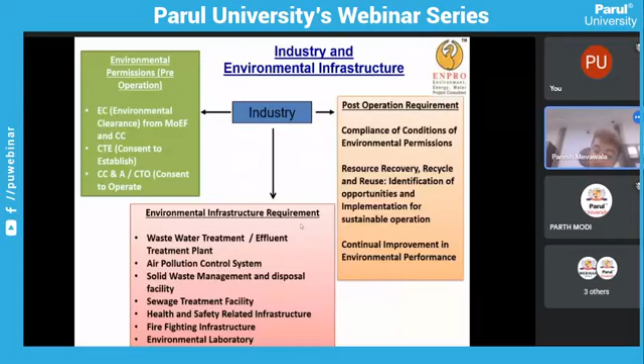So these are the general three phases for an industry, from the start of the industry to its operation phase. Now we will have a brief review on what are the legal requirements.

As far as environmental related permissions are concerned, the apex body is the Ministry of Environment and Forest, and Ministry of Environment, Forest and Climate Change, Government of India, at Delhi. The implementing agency sitting at Delhi is the Central Pollution Control Board, which has regional offices in various states. CPCB is basically an implementing and monitoring agency as per environmental laws and various notifications published by the Ministry of Environment and Forest.

At the same time, each state has their own forest and environment department at ministry level, and each state has their State Pollution Control Board, called SPCB. State-wise it is called GPCB for Gujarat Pollution Control Board, MPCB for Maharashtra Pollution Control Board, MPPCB for Madhya Pradesh Pollution Control Board, and so on. Each state has pollution control boards attached with their forest and environment department, and pollution control committees for union territories. These are the government bodies and authorities from where permissions are to be obtained.

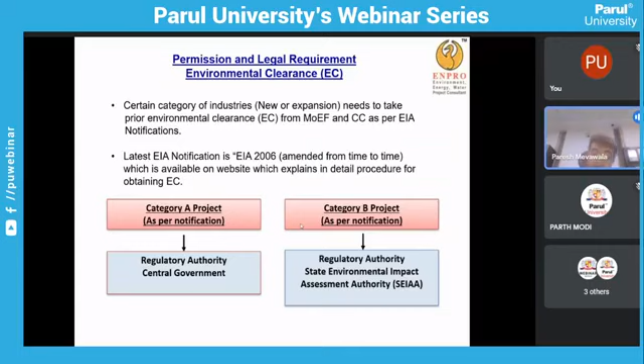And this entire environmental clearance procedure is an online procedure, the application, uploading of documents, everything is done online. So in brief, I will explain only in brief what are the stages of projects. Now, where is it applicable?

It is applicable for all new projects or existing projects who go for expansion or modernization, or they go for change in product mix, and falling under category A or B as per EIA, they need to take prior environmental clearance.

Now, what is prior environmental clearance? It is a clearance which you need to take before you start any new project construction phase or expansion phase. So you have to first take the permission and only then you can start the construction work. And the EC process, as per notification, you can go through that, and after that, they issue environmental clearance. So these are the stages.

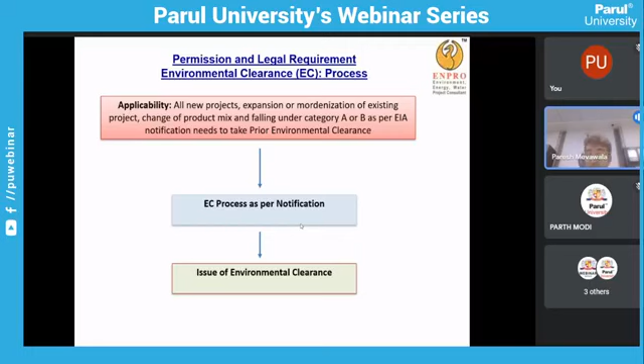All details are given in the notification, but these are the major stages which one should be aware of. For environmental clearance, you apply for terms of reference, which is online, and in which you have to give your project details, where it is located, what are the environmental features, what is likely to be the pollution load, what is the production capacity, what is going to be your effluent management system. It's a preliminary project detail with a project feasibility report, a small report you have to upload and apply for TOR.

Then on this application, either the committee, based on their scrutiny, grants terms of reference, standard terms of reference, or if they feel, they call for a presentation. If the project is very critical and it is not a conventional type of project, then they call for presentation for terms of reference. So one has to go for presentation to either Delhi at central level committee or at state level committee, depending on type of project.

Once TOR is issued by the committee, what does terms of reference specify? It specifies what you need to study in the EIA report. Everybody in environmental engineering field must be aware of what environmental impact assessment report is, so I'm not discussing what it consists of. But what I am discussing is that TOR consists of a number of points which need to be included in the EIA report, that is, the scope of the EIA report is finalized in terms of reference. So based on that TOR, the EIA study needs to be conducted.

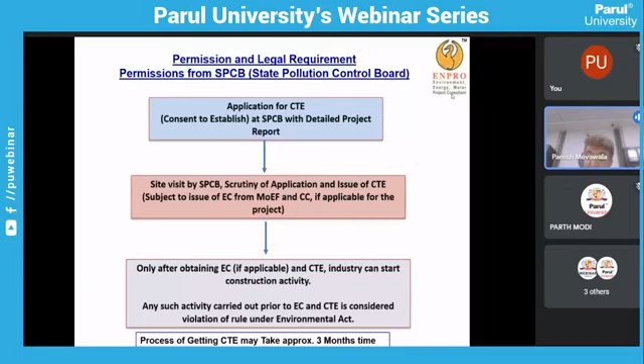Now, all polluting projects, whether they fall under EC requirement or not, have to get permission from the State Pollution Control Board. This is called a consent to establish application. So even if the project does not fall under EC requirement, they have to take consent to establish, which was earlier called NOC from the board. This is an online procedure, and one has to apply for CTE. Based on the site visit and scrutiny of the proposal, the State Pollution Control Board may grant consent to establish.

Once consent to establish is received, and environmental clearance is received, a project is considered cleared for starting construction activity. Then the phase of project execution comes, where industrial setup is done, pollution control systems are installed, and once the project is ready to start after execution...

industry has to apply for consent to operate. In that consent to operate, or CC&A, once industry applies, there is a visit of officers who check the compliance of industry according to the conditions laid down in environmental clearance and consent to establish. Once they confirm that industry has fulfilled the requirement as per application, they grant consent to operate to industries, and then industry will start operating the plant.

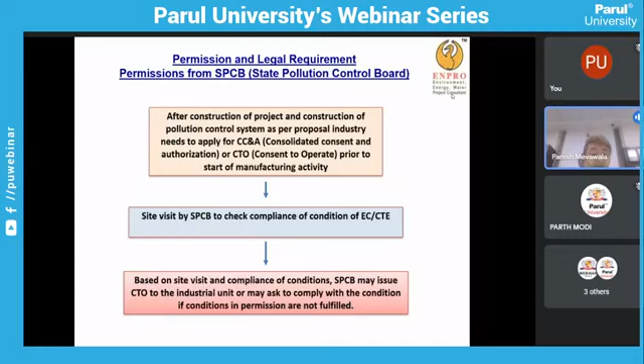Sometimes if they are not satisfied with the implementations, they may ask industry to complete the implementation. So these are the three basic permissions for establishing an industry to starting of industry, which are EC, CTE, and CTO.

In addition to that, industries are required to get approval of the layout map from local authority, permissions from factory inspector including fire NOC, on-site off-site emergency plan, risk assessment study, HAZOP study, etc. Those local level permissions are required, but are not part of environmental permissions, although they are supportive documents as necessary as environmental permission. So I think this is what I have covered about the various legal requirements from an environmental point of view to start an industry.

Now I will go to wastewater treatment plant. As we discussed, during your permission stage you have to give all details of what type of wastewater is going to come, and what type of effluent treatment plant you are going to propose. So the designing and planning of wastewater treatment facility comes right from the stage of application. For obtaining any permissions, design of an adequate, robust, and sustainable wastewater treatment scheme is very essential, which can address the requirement of disposal norms and mode of discharge for that specific site.

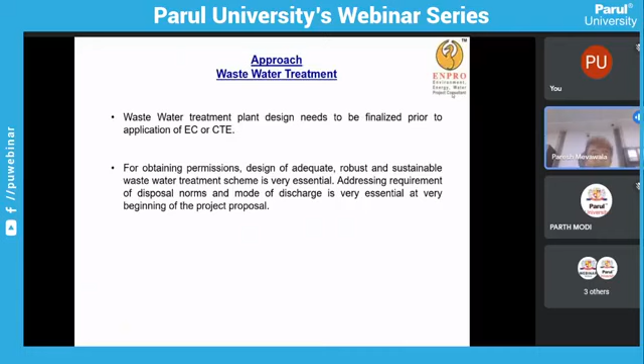So the question is how to arrive at a suitable wastewater treatment scheme for a new industry or an existing industry proposing expansion. It is very important for newcomers in this field to understand that any wastewater treatment plant design or implementation needs a thorough study of the wastewater being generated from the industry. It is very essential that adequate laboratory level knowledge is required by the environmental engineer. Maybe they are not involved in testing, or they may not do real analysis of the wastewater, which is generally done by environmental chemists.

But any environmental engineer has to understand the significance of various parameters in wastewater, and the significance of knowledge of laboratory level treatability study, based on our experience in these analyses. Generally, for them, this laboratory level knowledge is not a priority in their knowledge, but it is very important to have that laboratory level knowledge also.

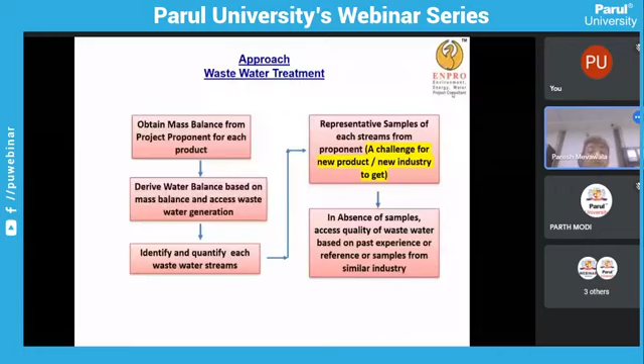And in the absence of samples, assess the quality of wastewater based on past experience, references, or samples from similar industries. Okay. That is why I told you in the earlier slide to segregate all streams generated from a single plant. Then divide the streams into 4 major categories like high TDS high COD, high TDS low COD, low TDS low COD, and low TDS high COD. And then based on higher concentrations of compounds such as heavy metals, phenolic compounds, ammonical nitrogen, hexavalent chromium, or any such parameters which need separate pre-treatment prior to common treatment.

It is essential, because if you club all streams together, the treatment will become very difficult, since some effluents are low in concentration and their treatment is relatively simpler than effluents having higher concentration. So if you mix all effluents together, your overall treatment becomes very difficult, sometimes infeasible and very costly to operate. So it is important that all streams be segregated at source, analyzed separately, segregated into different categories, and then work out a treatment scheme which becomes the most optimum treatment scheme.

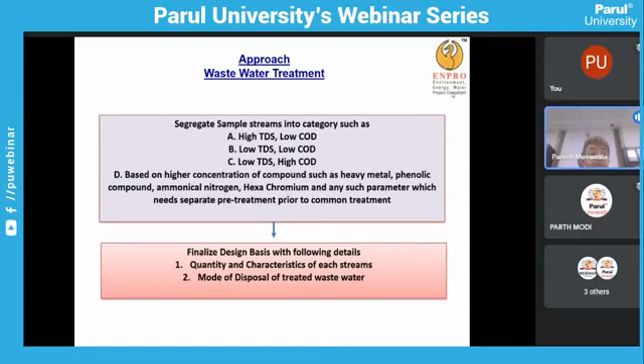Now, based on this segregation, one has to finalize the design basis for the wastewater treatment plant, which consists of the quantity and characteristics of each stream, and of course the mode of disposal of treated wastewater. Now, the modes of disposal can be disposal on surface water flowing to the sea, like a khadi, and norms of disposal on surface water are given by the State Pollution Control Board. But nowadays no such permission is being issued to dispose wastewater on surface water. Earlier this was being granted, but recently no such permissions are granted.

Then disposal to CETPs. CETPs are common effluent treatment plants. A CETP is a facility where the industry has to bring down its pollutant level up to the CETP inlet norms and then supply the effluent to the CETP. And the CETP will treat and then dispose it further. Then disposal to deep sea is another alternative. But for a single industry, this may not be possible. Disposal to deep sea can be done by a CETP or by a very large industry.

Then zero liquid discharge. What is zero liquid discharge? There is no disposal from the industry. The entire wastewater is treated to the level that the recovered water produced can be recycled back to the industrial unit. So it is called a ZLD unit, used in landlocked states. In Gujarat we have the sea and a disposal facility, but states like Madhya Pradesh, these North Indian states, or Rajasthan don't have any disposal point.

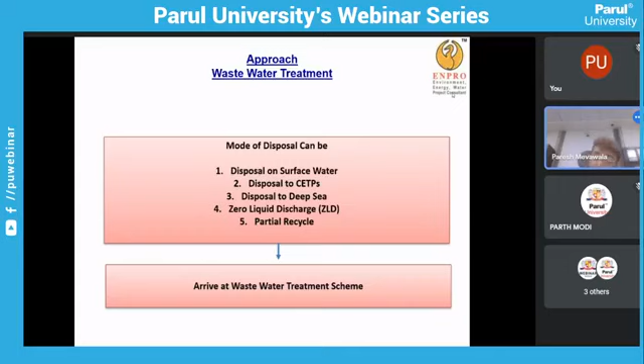So I have prepared a slide to show some typical treatment schemes for different types of wastewater. For example, this is for a low COD, biodegradable wastewater with TDS also on the lower side. These may be from textile or paper industries, industries generating a high volume of wastewater. They generally have this type of effluent characteristic, where the primary treatment does physico-chemical treatment and chemical dosing and removes suspended solids in clarifiers, and after that soluble COD and BOD are reduced in biological treatment, which can be aerobic or a combination of anaerobic and aerobic treatment.

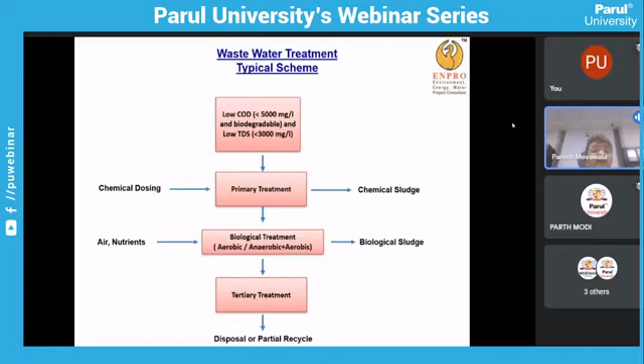I'm not going into those details because you have studied those things. I am focusing on how to arrive at the treatment scheme. Then one has tertiary treatment, and after tertiary treatment the effluent can go for disposal or partial recycle. So this is a typical conventional effluent treatment scheme. Probably you have studied it in your courses.

Then this is the wastewater treatment. Another type of scheme is when you have effluent of high TDS level, more than 15,000 milligram per liter, and low, medium, or high COD. Generally, when the TDS level goes above 15,000 or near to 20,000, biological treatment becomes non-feasible. It doesn't work. That is our experience.

And you will find a number of chemical industries, pharmaceutical industries, pesticide industries who generate this type of effluent, and a conventional effluent treatment plant doesn't work there. So one has to go with another type of wastewater treatment scheme where, after a primary treatment, of course, you have to remove suspended solids and sludges prior to the treatment, and then you have a membrane-based treatment where one uses ultrafiltration membranes, nanofiltration membranes, and RO membranes to separate TDS and COD from the wastewater.

And the permeate, that is good quality water from the membrane separation, is sent for recycling, and the reject, that's a concentrated stream from the membrane system much higher in concentration of TDS and COD, is subjected to evaporation in multiple effect evaporators or mechanical vapor recompressors with dryers. Here, energy like steam is used for evaporation, where from the concentrated stream water is recovered in condensate form, which is subjected to recycling.

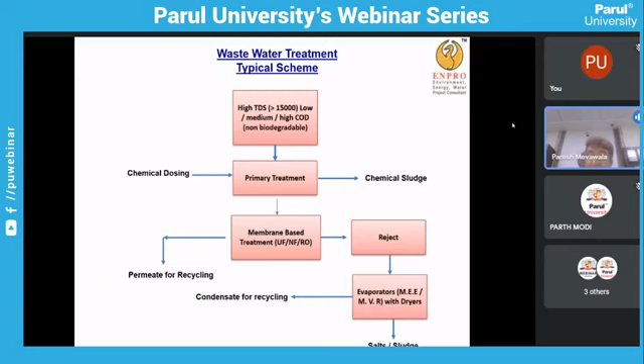And sometimes when such low volatiles, solvents like methanol, acetone, are present in the wastewater, the membrane system up front doesn't work, because the membrane system gets damaged in the presence of solvent. So in that case, one has to directly go to evaporators, that is steam-operated equipment, and recover the condensate, which will be contaminated with low volatiles and COD. That needs to be given a biological treatment followed by a membrane treatment. After membrane treatment, the good water will be recycled, and the reject from the membrane treatment will be fed back to the evaporator. So this is also a sort of ZLD scheme.

Second ZLD scheme, you have an evaporator followed by membranes. Evaporator followed by biological treatment followed by membranes. So these are the typical ZLD schemes used for pharmaceutical industries, chemical industries, pesticide industries, where effluents are very high in concentration. Here, conventional biological treatment does not work.

Now we come to another type of industrial effluent, which consists of inorganic pollutants like heavy metals, chrome, etc. Those are very toxic, and it does not consist of organic pollutants in large quantity. Generally, this type of effluent gets generated from engineering industry, coating industry, and electroplating industries. So here, many heavy metals may be present. If, let's say, chromium is present, for each type of metal there is a different set of treatments generally, which needs to be finalized at laboratory level and based on experience from past effluent treatment plants.

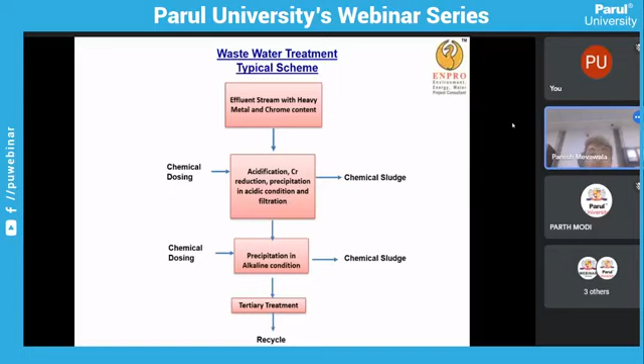Similarly, one example is about phenolic compound treatment. Phenol is very toxic for biological treatment. So before biological treatment, if the effluent consists of a lot of phenols or phenolic compounds, they need to be removed or knocked off prior to biological treatment. This can be achieved by using a phenol recovery unit, phenol distillation unit, recovery by ion exchange method, or phenol oxidation using Fenton treatment or ozonation treatment.

So you have to bring down the phenol level to at least less than 5 milligram per liter before the biological treatment. Sometimes in some effluents, phenol can be as high as 100 milligram per liter or more, so such effluent needs this type of pre-treatment. Many specific effluents will need a pre-treatment prior to taking that effluent to conventional effluent treatment.

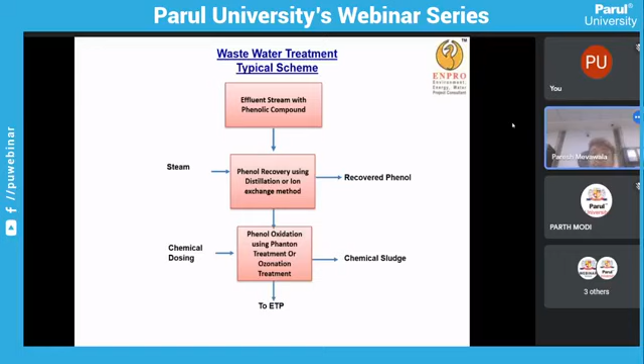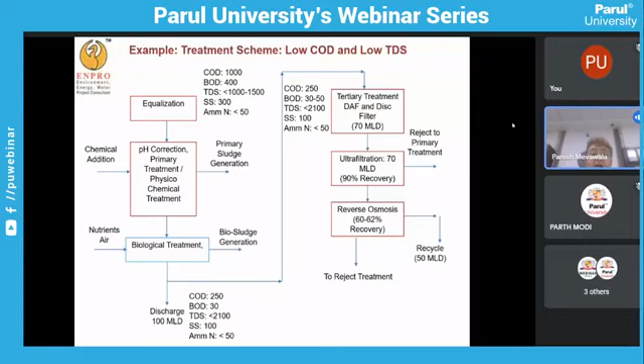So these are some real life examples of typical treatment schemes, like low COD, low TDS. As I told earlier, equalization, then primary treatment, biological treatment, then tertiary treatment, and a partial recovery of wastewater. This is for one of the CETPs which we have done.

This is another example of a CETP where you have multiple industries from the chemical sector and multiple types of effluent. Effluent is transported to the CETP through designated tankers. Tankers are analyzed, and based on the analysis, they are stored in different storage tanks, and from those storage tanks, for specific treatment, effluent is transferred to different sections of the wastewater treatment line, like C1, C2, C3.

So this is a very good example where you have to collect the wastewater in segregated form, store it in segregated form, and treat it as per the requirement in various sections of the CETP. This is one CETP which is under operation.

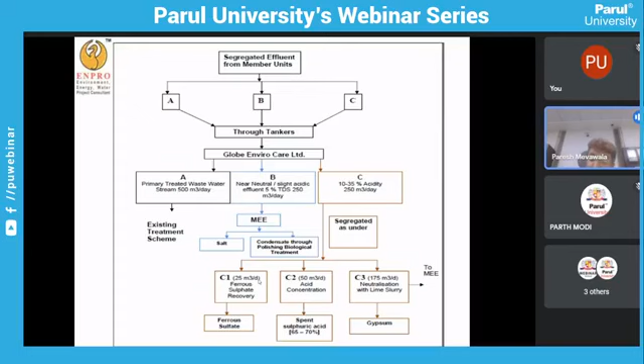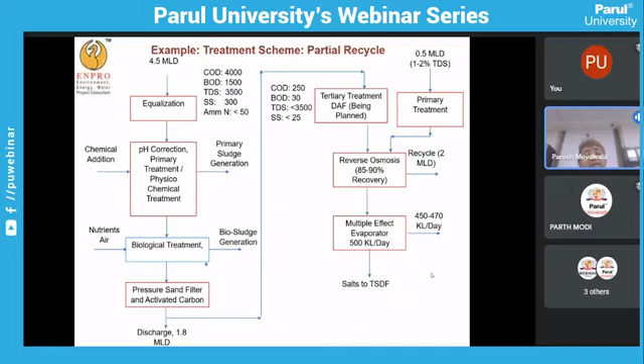Similarly, this is another CETP of about 5 MLD, where 50% of the effluent is subjected to zero liquid discharge and sent back to member unit industries, and the balance effluent is discharged. This also consists of primary treatment, that is chemical addition, then biological treatment, then tertiary, and then discharge. Part of this stream goes to a tertiary treatment plant consisting of DAF, RO plant, multiple effect evaporator, and here effluent is recycled back. We discussed all those examples and typical schemes in earlier slides.

Now this is the typical plant for one of the API units, where, as I told, the entire effluent is subjected to evaporators first, and then to ozonation, biological treatment, and RO plant. So this is another set.

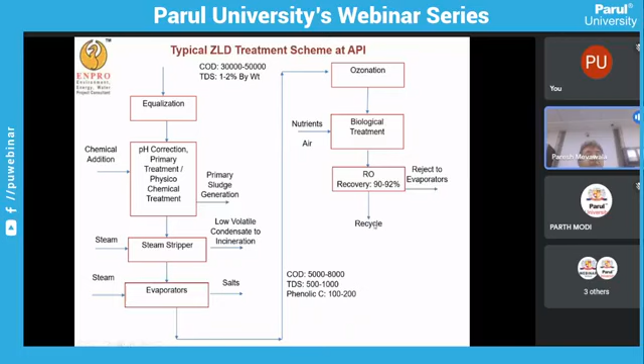So regarding wastewater treatment, the presentation ends here. What I mean to say is that a treatment scheme is not universal. It's not common for all types of effluents. One has to select a treatment scheme based on the quality of the effluent, based on the segregated stream analysis of the effluent generated from specific industries. So one has to design a treatment scheme which is robust and sustainable.

Robust means it should withstand the requirement without any hiccup in the operations. And sustainable means it must be operated at an optimum cost level, so it is sustainable for industries also, and suitable for the available mode of disposal at the location of the industry.

A chemical engineer or environmental engineer who works on this, because this work up to this point is process work, should be able to do basic sizing of the major components of the effluent treatment unit once the treatment scheme is done. This comes under your core study, which you have to study in future, and you have to learn how to size the equipment. Then you should be able to work out the consumption of chemicals and power, to work out the operating cost.

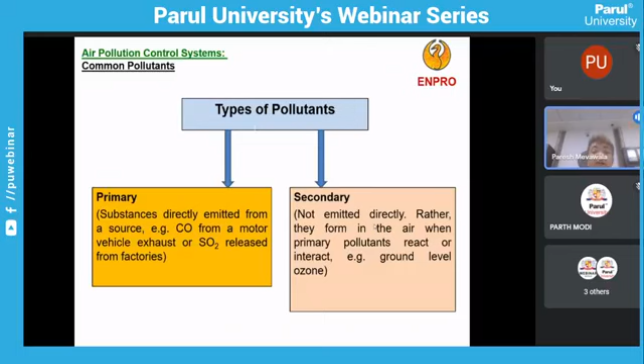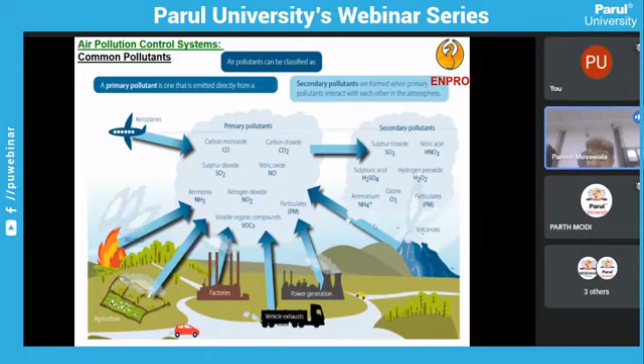So this I'll go very fast. Like, what are the types of pollutants? One has primary pollutants, such as carbon monoxide from motor exhaust and SO2, and secondary pollutants, which form in the air when primary pollutants react or interact, that is ground level ozone. So these are the various air pollutants, segregated as primary pollutants and secondary pollutants. I think you all know all these theoretical details, so I will skip this.

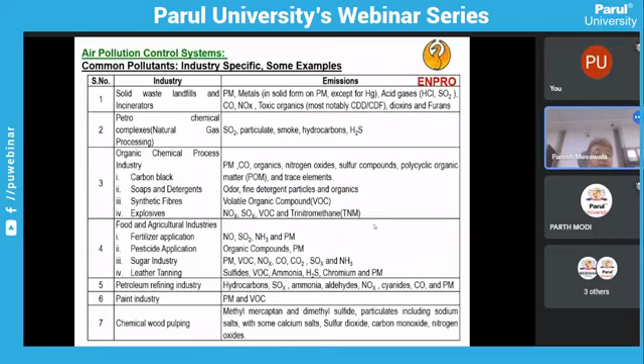Like the food and agriculture industry: fertilizer will have NO, SO2, ammonia, particulate matter. Pesticide will have organic compounds and PM. The sugar industry has PM, NOx, CO, CO2, SOx, ammonia. The leather industry has sulfide, VOC, ammonia, H2S, chromium, PM. So one has to keep this at the back of their mind.

Now, what are the different technological alternatives for air pollution control? The air pollution problem has three options for control. One is improve dispersion. Second is reduce emission by process change or pollution prevention, and third is use a downstream pollution control device. The first two options we will not discuss much. We will discuss the third option only, that's a downstream pollution control device.

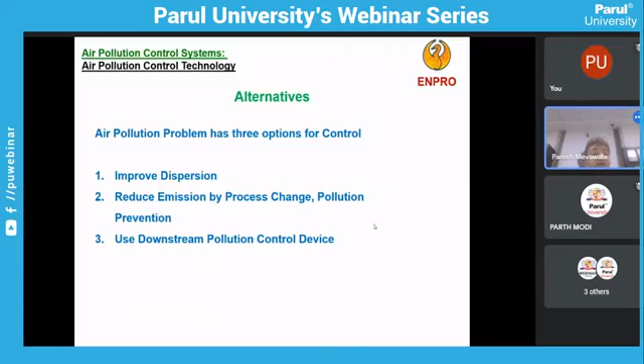Now the first alternative, improve dispersion. If you have studied dispersion analysis, how the flue gas from the stack goes to atmosphere, how the dispersion takes place, and what is going to be the GLC, ground level concentration. So if you increase the stack height, you increase the dispersion, and your GLC will come down. This is just a sort of dilution of flue gas into more volume of ambient air.

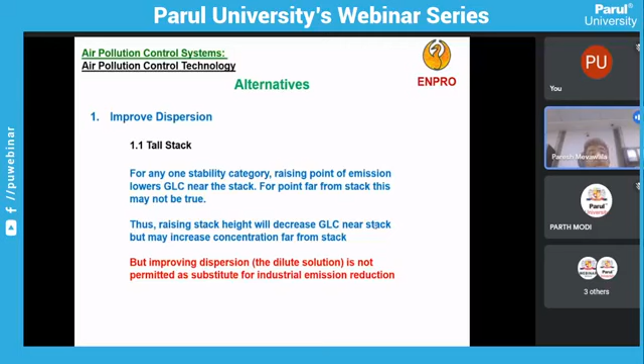But improving dispersion is not permitted as a substitute for industrial emission reduction. One has to keep in mind that dilution is not the solution. One has to treat either wastewater or air pollutants before they are discharged to the environment. Then another option is an intermittent control scheme, like you must have read in the newspaper, staggered vehicle traffic in Delhi to improve the ambient air quality, and sometimes not allowing operation of incinerators at night time in certain industrial estates near residential areas.

Then this is also very important, process change and pollution prevention. Sometimes you control the pollutant at source, you change the raw material so that your emission level goes down. For example, an oxygen based smelting process instead of an air based smelting process results in a high concentration of SO2, leading to feasibility of sulfuric acid production. Sulfur dioxide was earlier emitted in small concentration when air was used, so you had to put pollution control equipment. Now, when you use oxygen, you generate SO2 at higher concentration, so you can install a sulfuric acid plant to convert SO2 to sulfuric acid. So this is an example of a process change.

Similarly, switching to cleaner fuels. Similarly, carpool, mass rapid transportation systems, work from home. Maybe that is a compulsion, but these are the various alternatives for process change and pollution prevention.

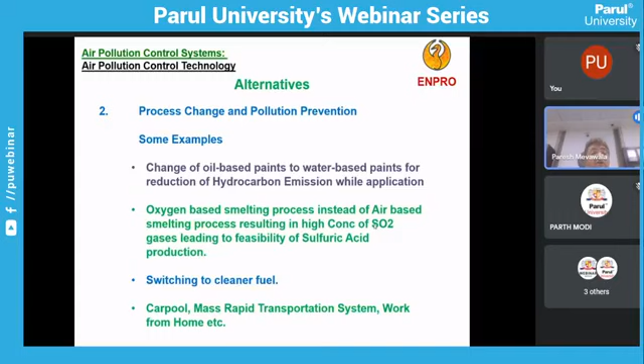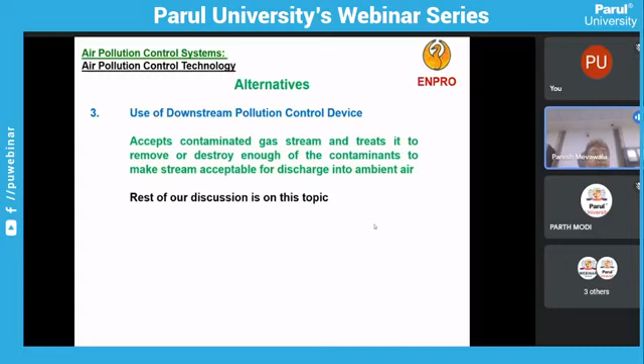Now, use of downstream pollution control devices. The rest of our discussion will be on this topic only. As we discussed for the wastewater treatment plant, the methodology for selection of an air pollution control system is again the same. You have to get input from the industry for a new system, survey, measurement and data collection at site for an existing system, and one must be aware of the statutory emission limits permitted to the industry.

How to survey, measure and collect data at site for an existing system? That brings into the picture stack monitoring, the skill of stack monitoring, study and testing of process emissions, testing of flue gas emissions at the laboratory after sampling. So again, engineers and chemists, even if they are not in this field or will not do environmental monitoring themselves in future, must be aware of what the measurement is, how data is collected, and the significance of the various parameters.

Then one has to fix the design, like flow data, operating condition, pollutant concentration, inlet, what is going to be outlet, and verification of design basis for identical industry based on past experience and reliable references. This is also very important, because when you do the first time selection of equipment, you must verify from various data for this type of industry what type of pollution control systems have been installed, what were their problems, what were their past experiences, so that you can improve your selection.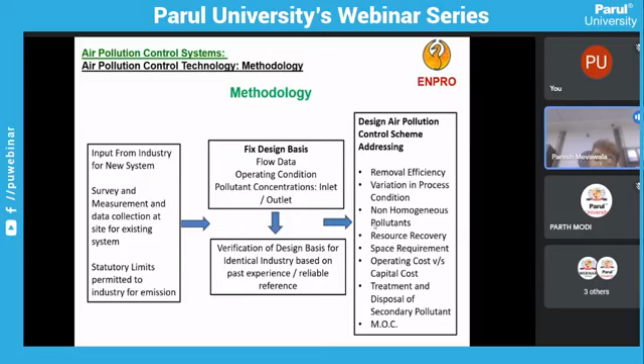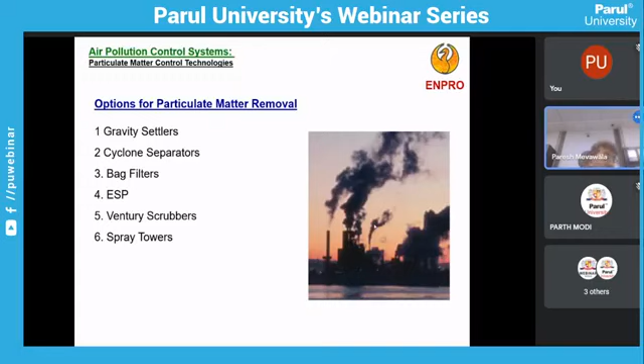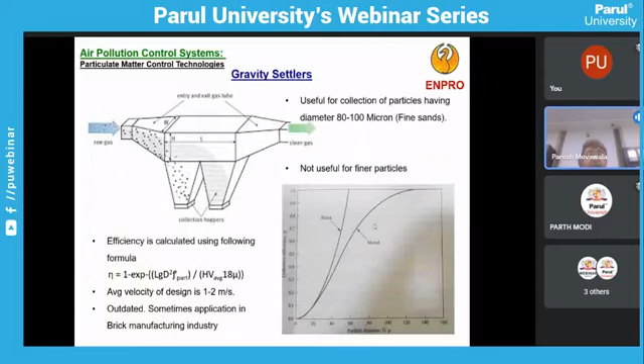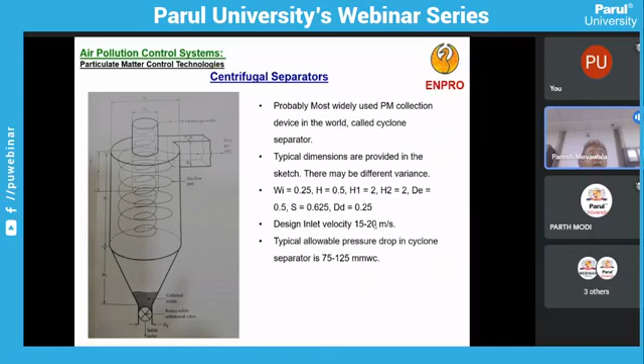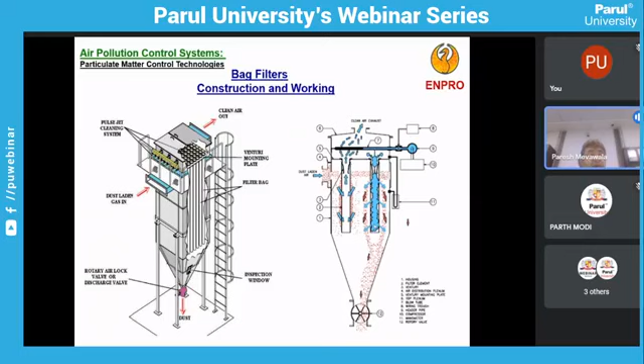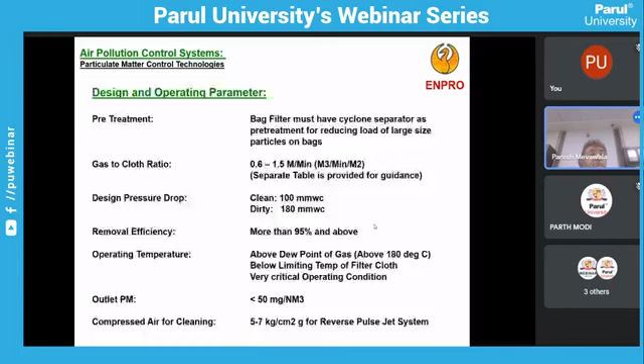These are different types of bag filters, reverse pulse system type, and there is a mechanical shaker type of bag filter where particulate matter is filtered on the bag surfaces and is recovered by reverse pulsing of air. So these are the bag filters for collection of finer particulate matter. These are various design criteria for the bag filters I have given. Most important is gas to cloth ratio, design pressure drop, and outlet particulate matter. These are the properties of various bags used for the bag filter, what temperature they can withstand, and based on the process condition, one has to select the bag.

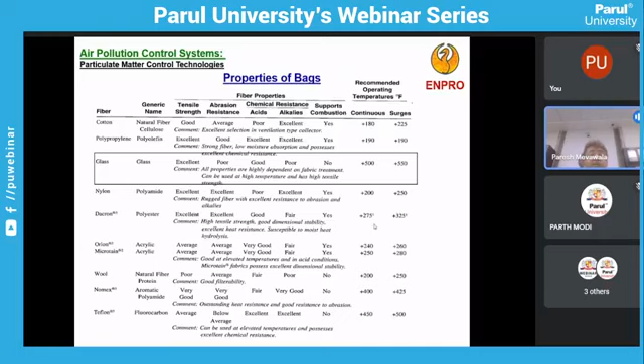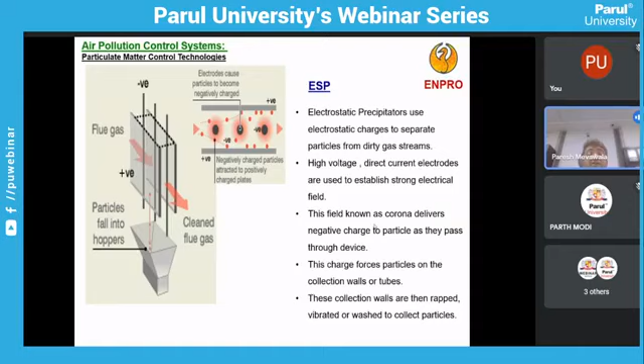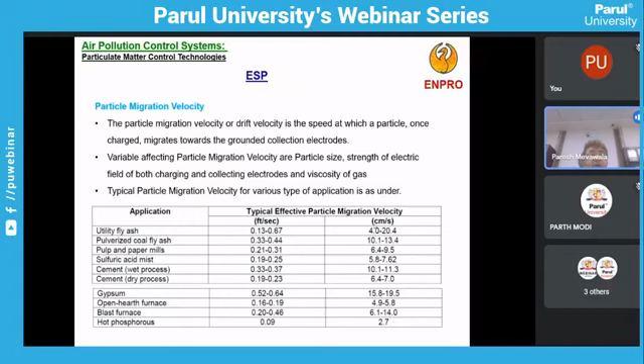Then there is an electrostatic precipitator. Electrostatic precipitator is highly efficient equipment for removal of particulate matter. Bag filter, electrostatic precipitator and cyclone separators are designed for removal of particulate matter. These are the various design criteria for electrostatic precipitator for different types of dust like utility fly ash, pulverized coal fly ash, sulfuric acid mist, gypsum, open hearth furnace. Dust which is very low in conductivity has lower removal efficiency. Dust which is high in conductivity has higher removal efficiency. So accordingly, ESP is sized.

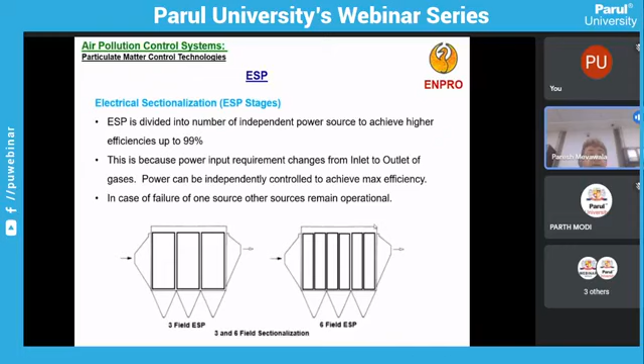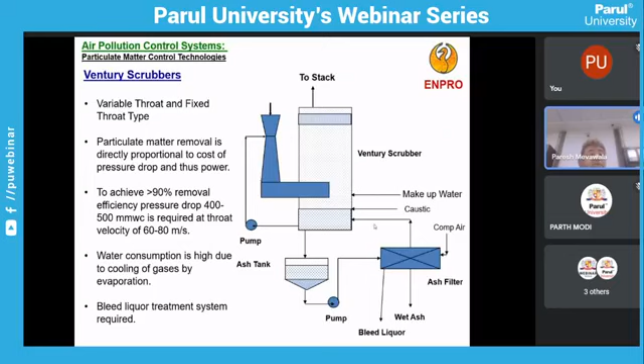Multiple stages of ESPs are generally installed, 3 stage or 5 stage or 7 stage, to achieve very high removal efficiency of 99%. Generally, power plants and large boilers have ESPs. Then one has a Venturi scrubber. What we discussed is dry removal. Now, this is wet removal. Venturi scrubbers are a wet scrubbing system used for simultaneous removal of particulate matter and gaseous pollutants. These can be fixed throat type and variable throat type Venturi scrubbers for removal of particulate matter and gases.

So advantages are it is smaller in size than bag filter and ESP. Simultaneous capturing of particulate matter and SO2, HCl can be handled in single equipment. It is robust equipment with less chances of failure. But what are the disadvantages? Operating cost is high. Then it generates a very large quantity of secondary pollutants, that is wastewater containing a lot of dust. So that needs another treatment plant to handle it. In dry scrubbing, you get dry dust at the bottom. Here, you get a liquid slurry at the bottom, which needs to be treated again.

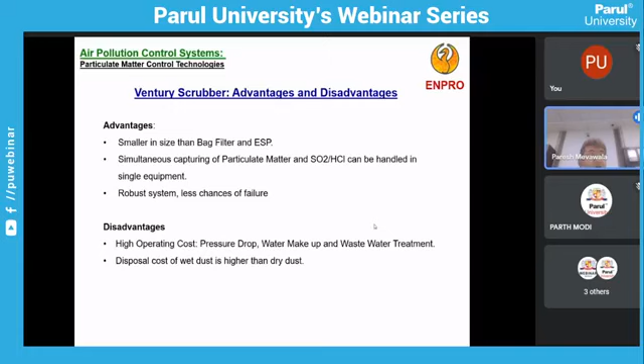So, one can follow this guideline for selection of technology. Cyclone separator can be used when particle size is 10 micron and above, and overall efficiency is 70 to 80%. Capex 1 is the lowest, and 5 is the highest. So capex and opex both are lowest. Multi-cyclone separator, you have 5 micron and above particle size, and 70 to 80% removal efficiency. Bag filter, when up to 1 micron particle size, you need a bag filter. Then ESP up to 2.5 micron, 99%, and pressure drop is very low. So it has the highest capex, but the opex is lowest.

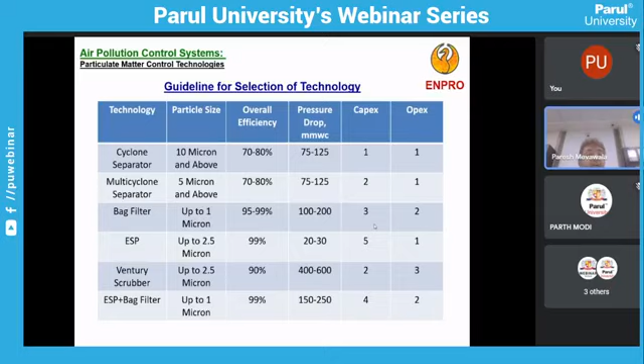ESP at that efficiency. If you see the bag filter, your capex is at number 3, but opex is also at number 2. Venturi scrubber, again capex is very low, but opex is very high. Sometimes you have to go with a combination of ESP plus bag filter, where your capex is at 4 and opex is at 2. So depending on the process condition, type of dust, and volume of process gas, equipment combinations are selected.

This is one example of how complicated an air pollution control system can be, for hazardous waste incinerators. Here you have major pollutants like particulate matter, SO2, HCl, NOx, heavy metals, vapor, VOCs. All these types of air pollutants are available in the gas incinerator, where you have multiple stages of air pollution control, like after combustion and waste heat recovery, you have a gas quencher.

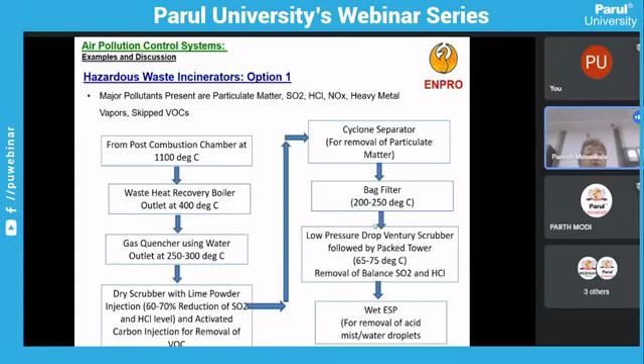Then one has a dry scrubber with lime powder injection. 60 to 70% SO2 and HCl is recovered, followed by activated carbon injection for removal of VOC. Then one has a cyclone separator, then bag filter, then low pressure Venturi scrubber, then wet ESP. So if you see, it consists of all equipment in a single plant, because the emission norms are very stringent, generally, and emission concentrations are very high.

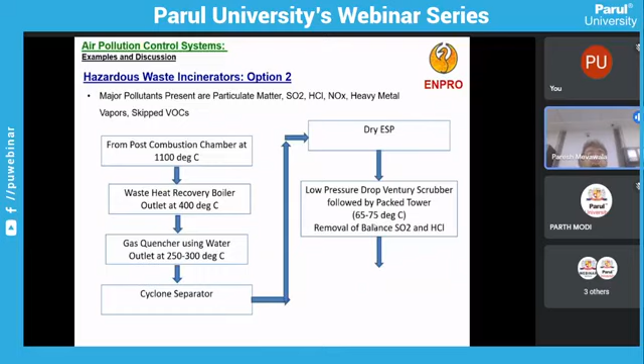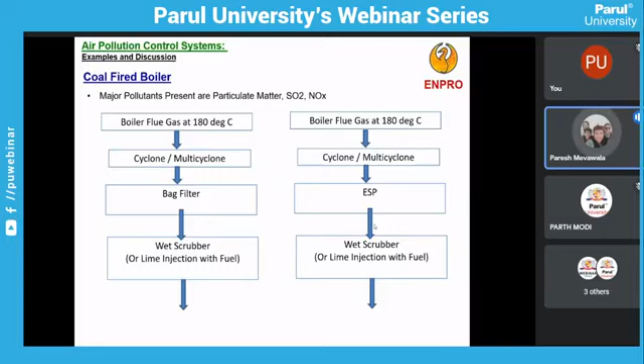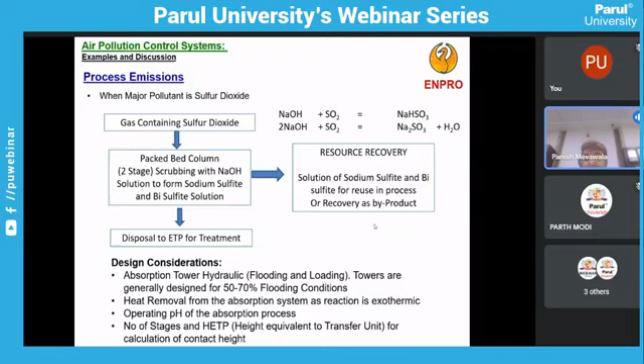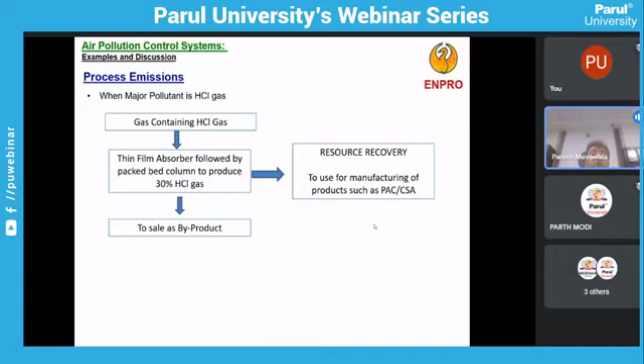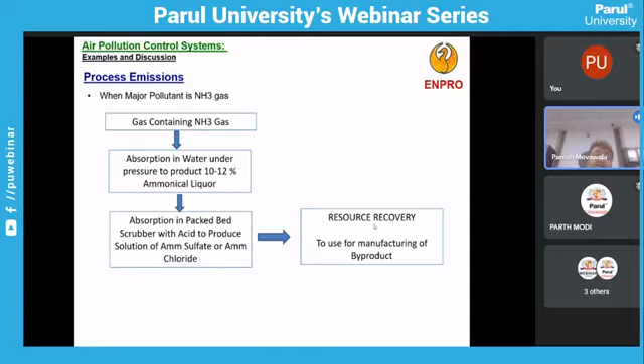This is being implemented and operating at many places. This is the scheme provided. Similarly, for HCl also, you can scrub HCl and generate 30% HCl and reuse it in the process. So this is also resource recovery and reuse of pollutant. Similarly, for ammonia gas, you can generate ammoniacal liquor, which is a raw material for amination reaction. So this goes as resource recovery.

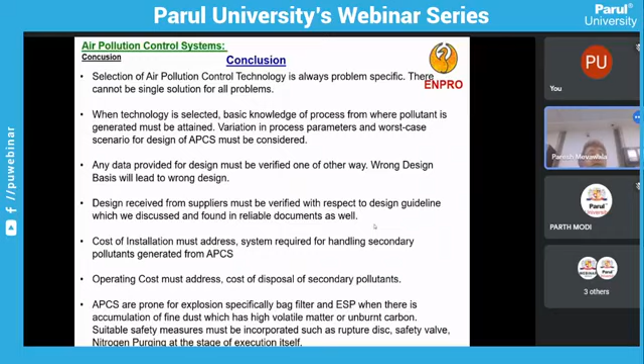So, conclusion about the air pollution control system: selection of air pollution control technology is problem specific, and when technology is selected, basic knowledge of the pollutant should be there. Operating cost must be addressed, and cost of disposal of secondary pollutant must be addressed. So now, very quickly, since we have very little time, we will go for industrial hazardous waste management.

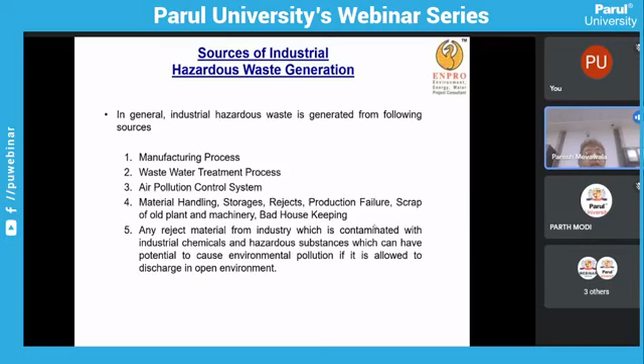If you have seen, during wastewater treatment you generate solid waste, and during air pollution control treatment also you generate solid waste. So the disposal of industrial hazardous solid waste is very important. For that, one can refer to the Hazardous and Other Waste Management Rules 2016, which is available on the website, and which defines how waste should be disposed of. In general, industrial hazardous waste is generated from the manufacturing process, wastewater treatment, air pollution control system, various material handling systems, and any reject material from industry.

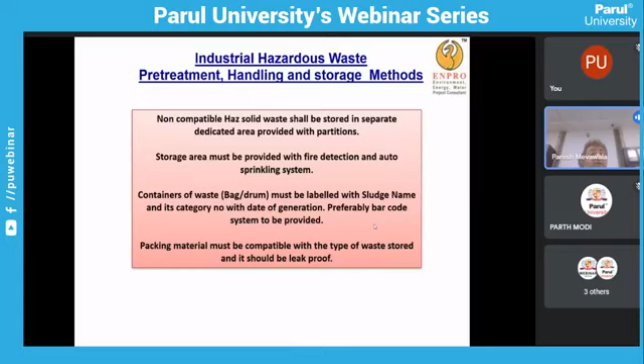When hazardous waste is generated, it is stored in a dedicated storage area provided with fire detection, auto sprinkling, an impervious liner at the bottom, covered from soil on top and sides, so that it does not come in contact with water, rainwater, or outside water. So it has to be stacked properly at the industrial site. Such hazardous waste storage area is a mandatory requirement for storage of industrial hazardous waste.

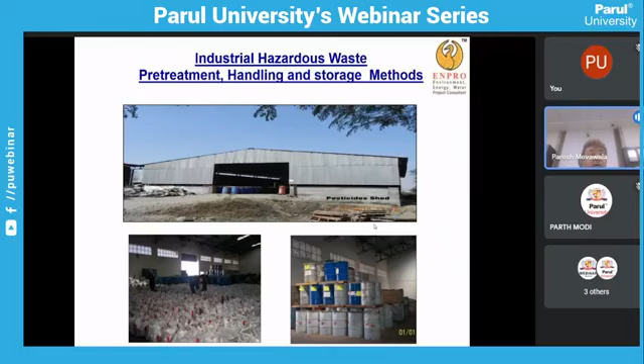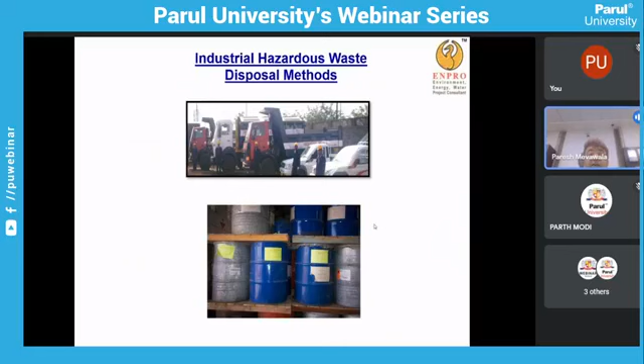Minimum 90 days storage capacity has to be provided, and this hazardous waste is then disposed of to a common hazardous waste disposal facility as per the qualification of the waste, through a dedicated transport vehicle. All containers of hazardous waste must be labeled properly as per the hazardous waste rules and must be identified. A landfill operator must be able to identify this hazardous waste based on the label.

So these are the routes for disposal methods of hazardous waste at a landfill site. Some hazardous waste which qualifies can directly go for secured landfill. Some hazardous waste will need a stabilization treatment for stabilization of mobile particles like heavy metals, prior to landfill. Then hazardous waste which is high in organic content, having high calorific value, more than 2,500 calorific value, needs to be disposed of through hazardous waste incineration. And some hazardous waste, after pre-processing, can go to the cement industry for co-processing.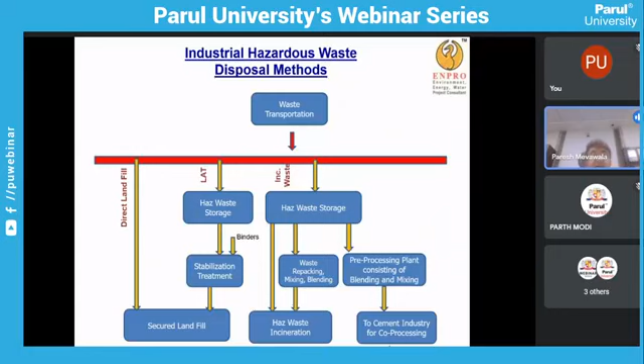So basically, there are three ultimate disposal routes: one is secured landfill, maybe with treatment or without treatment; second is incineration; third is the cement industry. These are photographs just to give an idea of how the landfill looks. These have bottom liners as per CPCB guidelines. This landfill you can see is a closed landfill, with grass on top. This is, at the bottom, a filtration system provided in the landfill.

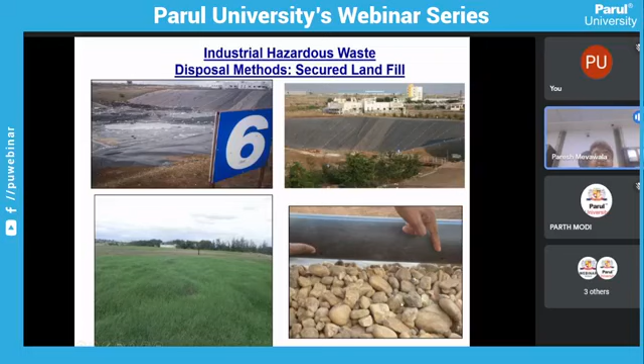I will not go too highly technical here. This is a bottom liner - two liners are provided at the bottom. HDPE liners, two levels of HDPE liners, are provided at the bottom so that hazardous waste remains at the top and does not come in contact with the natural soil.

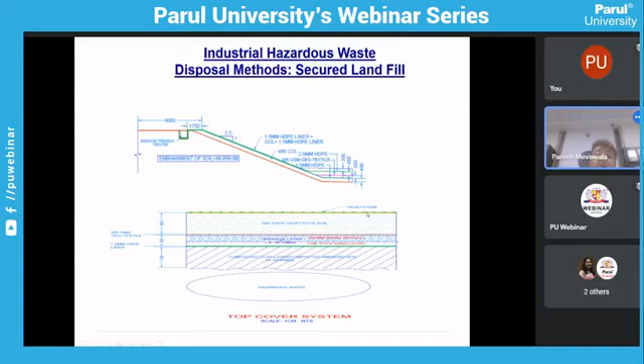Similarly, these are the liners provided at the side slope of the landfill, and the liner provided at the top after the capping of waste. When the waste is filled up to this point, then these liners are provided at the top also.

This is a stabilization treatment. When hazardous waste consists of heavy metals which can leach out with water in the landfill, they need to be fixed by addition of binders like cement or fly ash. So hazardous waste is mixed with cement and fly ash in mixers, put into stabilized waste moulds, and only after leachate testing are these moulds sent to the secure landfill, so that their leachability is minimized or reduced.

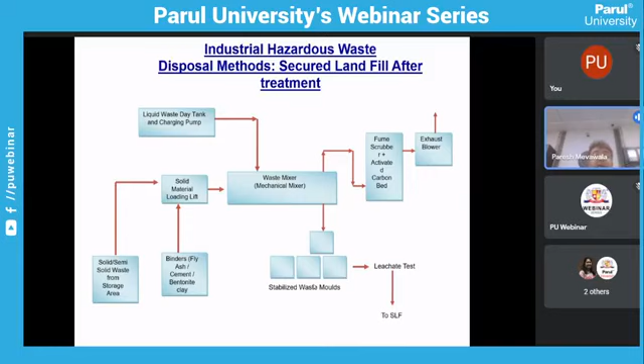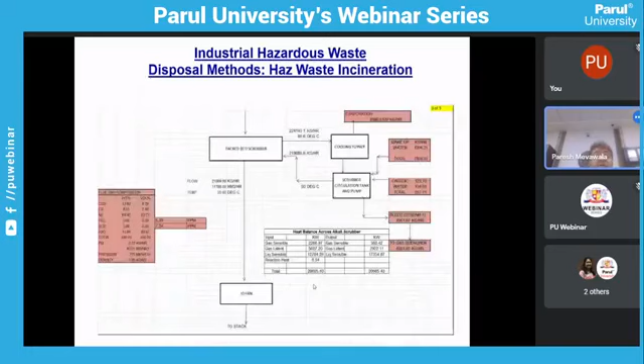This is the scheme for incineration. The incineration process consists of a primary combustion chamber, secondary combustion chamber, and a series of air pollution control systems, which we discussed. These are practical photographs of large incinerator plants installed in India for hazardous waste.

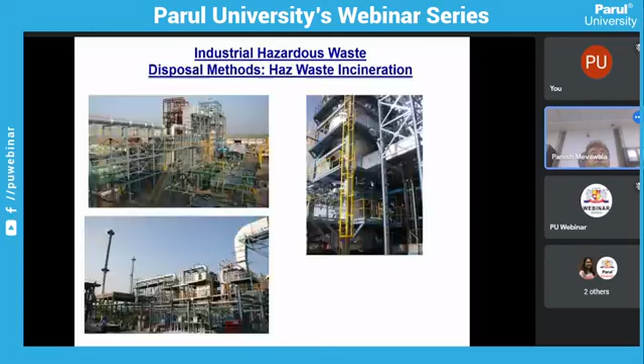Now, what is pre-processing for cement co-processing? In cement industry - you must have studied how cement is manufactured - there is a rotary kiln which operates at 1300 degrees centigrade. This provides adequate time and adequate operating conditions for destruction of toxic organic compounds in the rotary kiln.

So waste which can go to the cement industry is prepared at a facility so that a uniform quality of waste is achieved, and that waste, packed in bags, is sent to the cement industry where it goes as fuel. By sending waste to the cement industry, it reduces fuel consumption there, essentially replacing fuel - a benefit to the cement industry as well as to the nation.

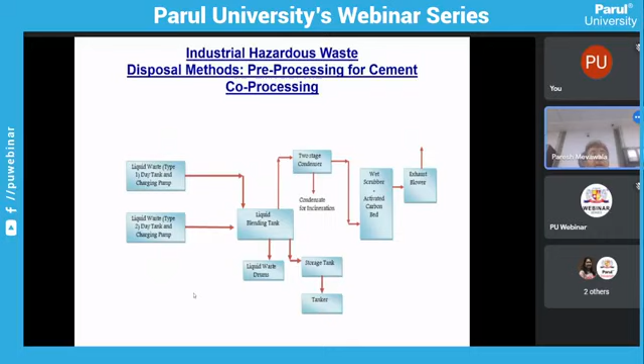Similarly, a liquid blending system schematic flow diagram is provided showing how liquid waste can be blended and sent to the cement industry.

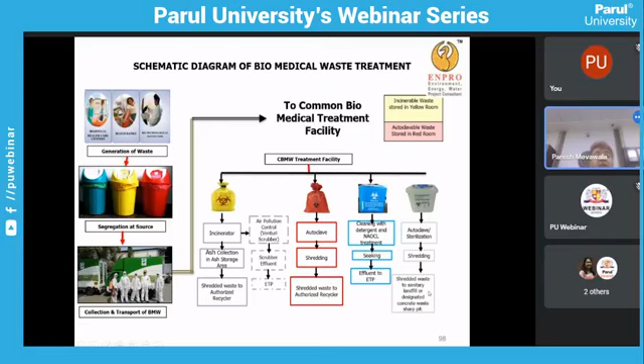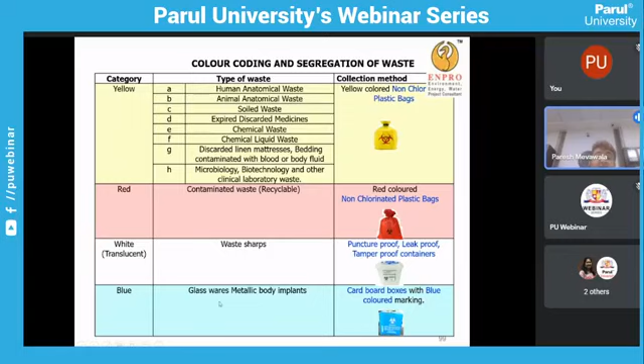These are typical biomedical waste management facility setups.

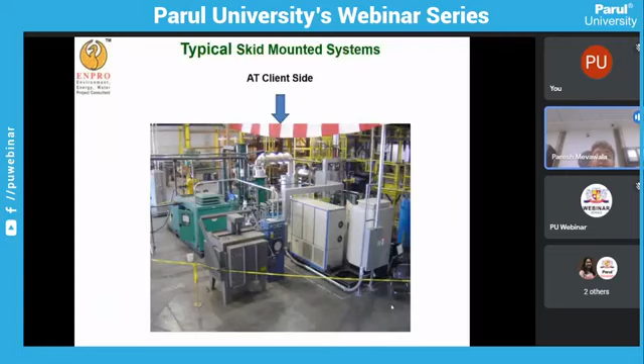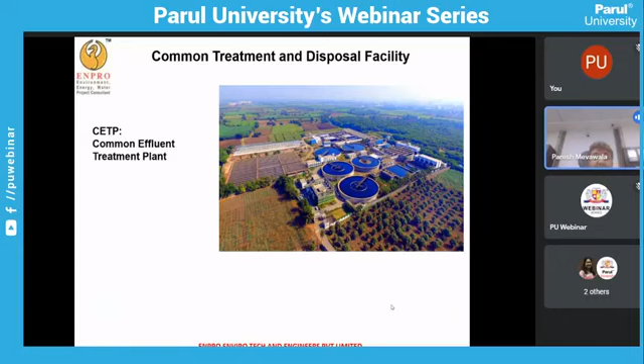Just to brief, what is a common treatment and disposal facility? The CETP is a common effluent treatment plant - we call it CETP, and it looks like this. This plant is based at Surat, shown here in an aerial photograph.

Post-operation compliances mainly involve monthly or quarterly sampling and analysis of treated wastewater, stack gas, and ambient air; monthly submission of various production details; yearly and half-yearly environmental audit reports; compliance reports of environmental clearance; details of corporate environmental responsibility; and details of green belt. These data need to be submitted to the statutory authority on a regular basis.

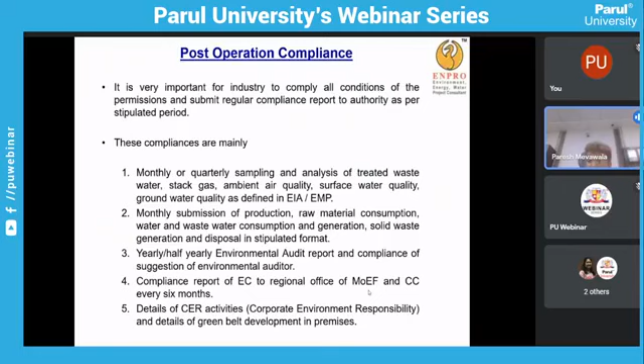Thank you. I think I've taken a little more time, but now it is over. I'm open for discussion.